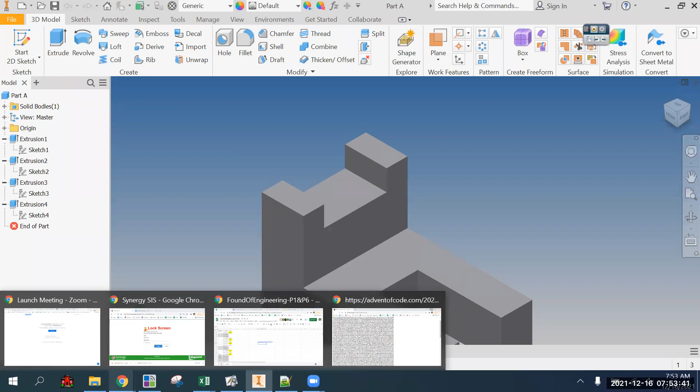All right. So plan for today is we are starting the dimensioning, a little more dimensioning, advanced dimensioning practice. But this is the first video for first period. And the way it's going to work is, because the overall goal is to dimension every part from the part file, from the green sheet, I'm going to be doing half of them in first period and the other half in sixth period. And so we already did part A and B in first period, and this video is going to be part C and D, probably, maybe more.

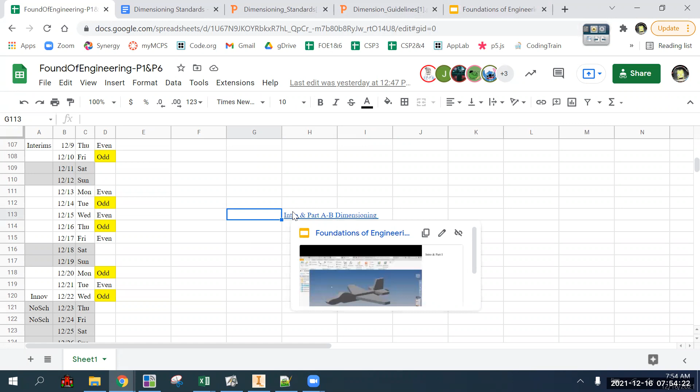But because it's the first one for first period, I'm going to do the introduction portion of what we're doing and then go into part C and D dimensioning, because it doesn't really matter the order that we dimension the parts from the green sheet. We're going to get them all, just with enough practice.

All right, so here is the situation. First, some technical stuff. We are going to be in Inventor, and we're going to make a new drawing file. And this drawing file is going to be similar to the one from the Puzzle Cube, where we had one drawing file, but with several sheets to have everything organized.

And I would like to have, I guess you can move them around pretty easy. All right, well, then I guess we could do these out of order. There you go, that's the thing.

We're gonna have one drawing file with 12 sheets, one for each of the different letters, parts from the green sheet, and they are each going to be a multi-view, front, top, right, top right, 4 views on the same sheet with dimensions. The point of this is not for you to just make these sheets and throw dimensions on there. It's to learn the process of dimensioning and putting dimensions in the right location and not over dimensioning, and so on.

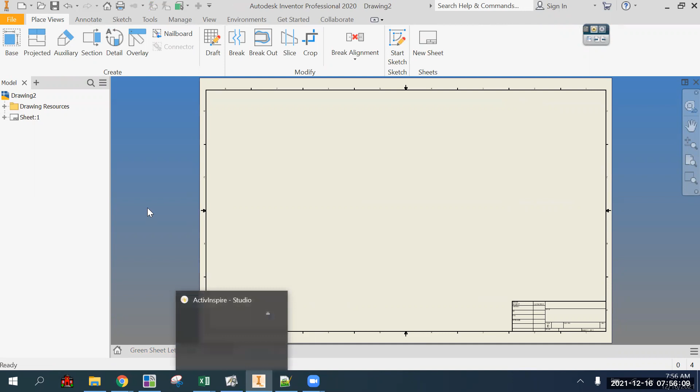Now, first, technical issues: if you didn't do all of the green sheet parts, you're going to have trouble with doing this, because in order to do the multi-view of something, you need the file that it's based on. Okay, so if you are someone who does not have all of the green sheet shapes, you need to acquire them. Now, the way you're going to do that is from your main folder window. You're going to find the handout folder, which is down here.

You may have never used the handout folder before. You're going to go to Holt. And again, this is only if you don't have all 32, all letters and numbers of the green sheet. Okay, handout, Holt. It's in period 1 and period 6. Right click on green sheet parts, that folder, do copy, and then right click on My Documents and do paste.

And the reason for that is, even though you could, in theory, open up and make drawings from the parts directly from this handout folder, I don't want to do this, I want to cancel that. That could be bad. You're not going to be able to make changes to them the way you would if you had ownership, and that's why you would make a copy. But again, that's only if, is there an undo? I shouldn't have done that. So either way, first you need to have all of the parts, all of the part files.

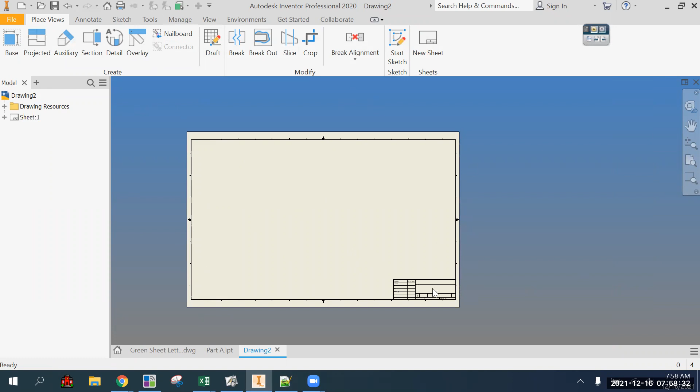Step 2 is make a new drawing file. And like I said, we are going to have one sheet for each of the letters. This drawing file is going to have 12 sheets, one for each of the 12 letter parts. And each sheet is going to be a multi-view, like I showed before, with top, right, and center. So let's start by getting our 4 views on the sheet, and then we'll talk about the right place to put all of the dimensions and the mantras and trade-offs and that sort of thing.

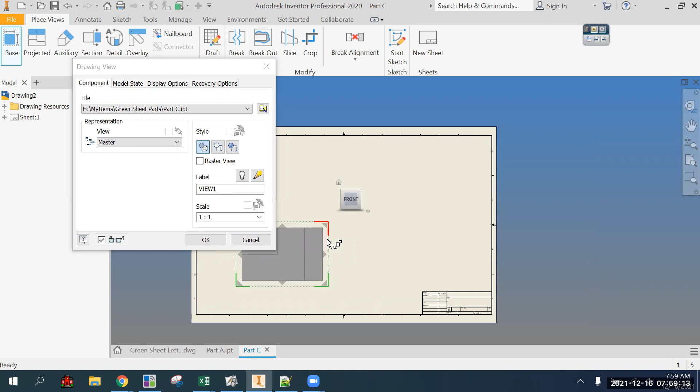So we're always going to start with a base view. You're going to click on the Finder button and choose the part file that you want to start with. Let's start with part C for now. Hit open. Now, a couple of things happen automatically. First, because of the way that we made the part, it's going to guess this as your front view.

And for almost every single one of the green sheet parts, the front face is probably going to be the best front view, and that's just because of the way that we made them. But sometimes your best front view is not going to be the one that comes in as front, and actually choosing the best front view is part of doing good technical drawings. The front view is going to be the view that gives the most information about that shape.

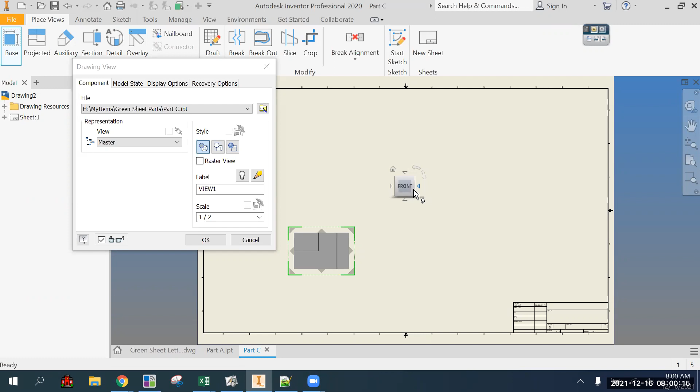Most of your dimensions are going to be on the front view. Most of the contours around the outside are going to be on the front view. And for now, we'll just go choose this as front view.

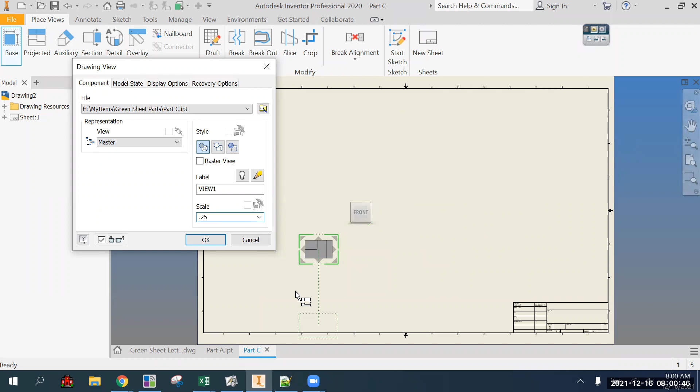Okay. Then as far as scale goes, again, a coincidence that a 1-to-1 scale seems to work well on the size of our sheet. This is a complete coincidence. Your drawing might come in and 0.25 might be the right size if you're drawing something big. The sheet itself has built-in dimensions. It's based on an actual piece of paper.

I don't think it's our traditional printer paper, but is that 8.5 by 11? It might be, but oh no, it's probably not. But the 1, 2, 3. No, it's much larger than that, because this is 9 inches across. So this is a giant piece of paper. Anyway,

based on the size of your actual part file, you're going to need to scale it, but you want to scale it so that it takes up most of one of the corners or quadrants, one of the quarters of the paper, so that you can fit 4 views comfortably. You definitely don't want them overlapping the edges or each other. In fact, to start, I'm going to make this 1.25, and you don't have to actually do 1.25 to 1, just to show you what slightly too large looks like. And you can change it very easily.

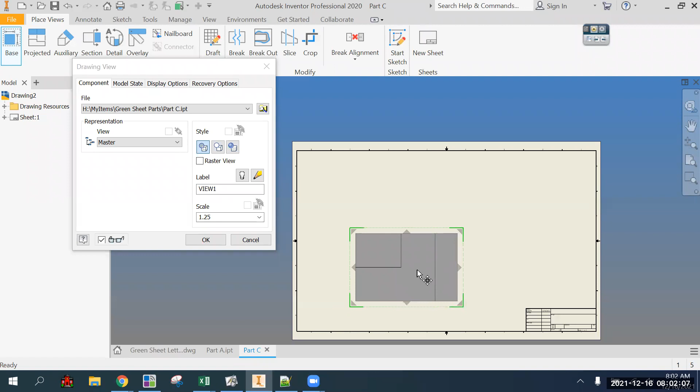So we're going to put our front view down here in the bottom left, and that's our base view, and hit OK. Then we're going to go to projected. Click on the view we want to project, which is our front view. And actually, I'm going to get rid of some of these toolbars so that we get a few more pixels to work with. Okay, so I am viewing this one, the front view.

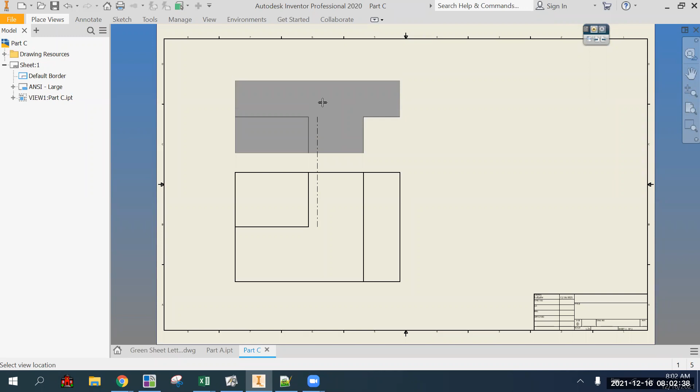So I clicked on that, and now I click up here where I want my top view. You'll notice that it lines up exactly. Even if I move my cursor left and right, it doesn't make it slide. It forces it to line up exactly, unless you go past a certain point. But either way, top view there, right view over here. Okay, you can see it just gave the outlines, which it's supposed to.

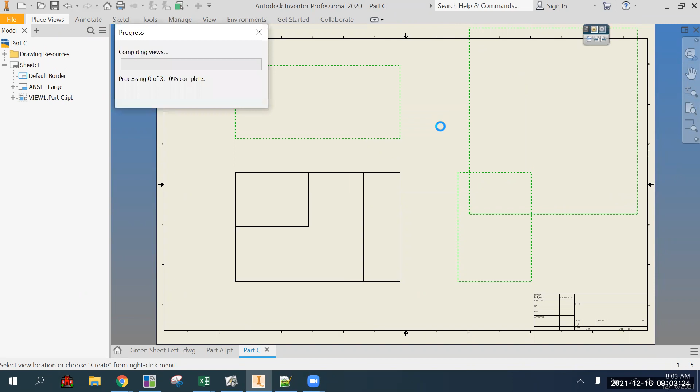And you can see it's starting to get a little crowded, even though our front view sort of looks like about filling up one quadrant of the page. Either way, I'm going to go ahead and make my top front right corner view here. We'll do right click, create. Once you have your 3 projected views, right click, create, and you can rearrange them.

The top view can only be arranged up and down because it has to line up with the front view. And same thing with the right side view, can move left and right. If you want to move the location of all 3, you need to move the front view because they're all always going to be tied together, which is critical. And even if I rearrange things, it's a little tight. So I'm going to go back to the front view, do right click, edit view, and change the scale to just 1 and hit OK. And it will update the other 2.

Editing view on one of these orthographic views, which are these, doesn't change our isometric view. So we need to right click edit on that and change that to 1. Can't decide if I want to stick with our hidden or shaded or unshaded view. I don't think shaded adds that much just because it's monotone, and yeah, we'll just stick with our basic unshaded, the default.

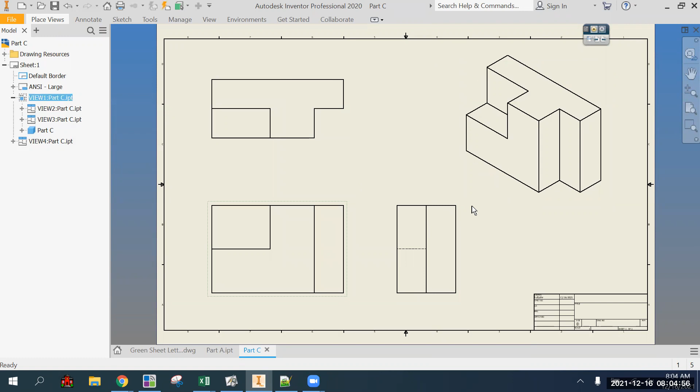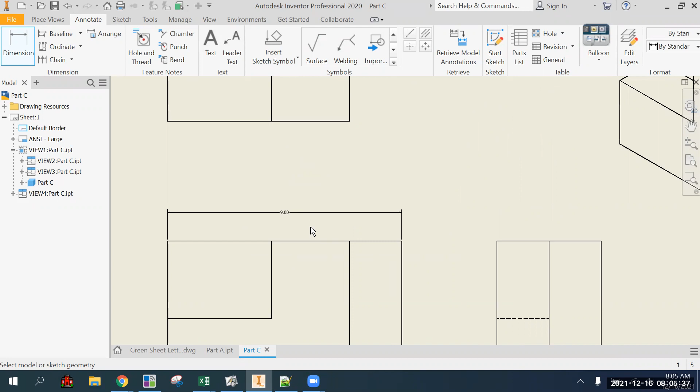All right, so this is our base for this, and we're going to add in under annotate. Dimension is our main tool. It's also hotkey D for dimension. And it is a lot like dimensioning the part itself, dimensioning the sketch before you do the extrusion when you're making the actual part. Except the difference is that the reason you put dimensions on it is to show how big something is rather than to change and constrain how big something is the way that you would when you actually built it.

And that goes to the entire point of this. The point of this is sort of a blueprint that you could give to somebody and they could recreate this part exactly from only the information on a single sheet. That's why you need multiple views. If you just had a front view, you could give all of the height and width dimensions that you need, but there's no way to explain what's happening here without some sort of depth view. Okay, same thing here. We don't know that there is a notch here unless you have the top view.

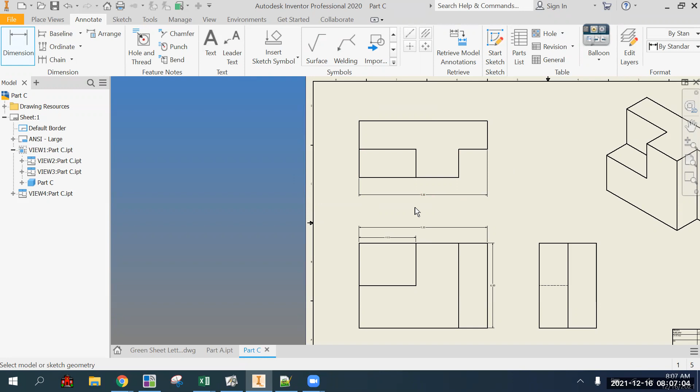But the key is knowing where to put these dimensions to make sure you have enough dimensioning that you've fully dimensioned it so that somebody could recreate it, but also making sure you don't have too many dimensions or over dimensioning or redundant dimensioning, because even though these are very simple parts, if you had the total width dimension twice, nobody's likely to be confused.

But if you have a super complex part and you start throwing in redundant dimensions, it can quickly get out of hand. And that's sort of one of the principles of dimensioning, is keeping it neat and tidy for the sake of avoiding confusion. So that's what we're going to work on. All of the rules for dimensioning and processes are about avoiding confusion, avoiding lines crossing over, avoiding dimensions on the part, trying to dimension to the contour, okay?

Meaning this location right here, either this line from this side or this line from this side, they're dimensioning the same thing, even though they're different numbers. You are giving the horizontal location of this feature. The problem is on the front view, you can't really tell what it is. You just know there's a line that is 7 inches from the left or 2 inches from the right. On the top view, it shows that is referring to this sort of cutout in the front right. So the dimensioning of the location of this line should be on the top view. Okay, and it's a lot about trade-offs, which is the better place to put it.

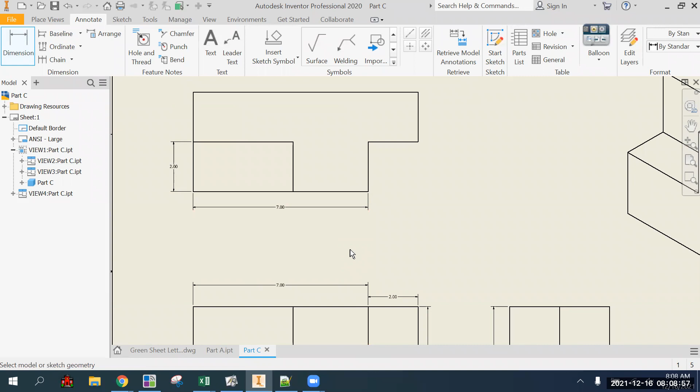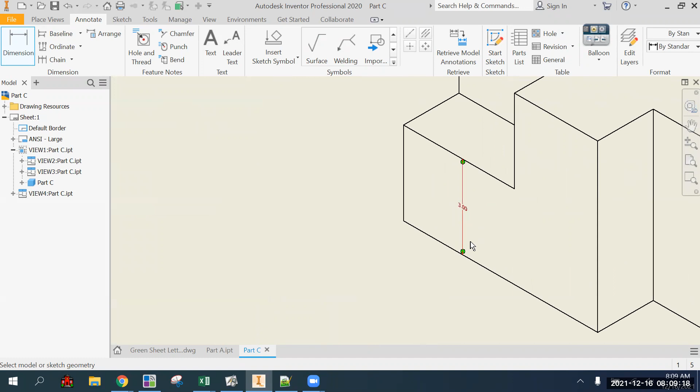Same thing with hidden lines. So the height of this ledge, which theoretically we could put the dimensions on the isometric view. In fact, I think that looks pretty cool, but that's not what we're going with. The height of this ledge is 3 inches off the ground, but that means we either need to put it, let me get rid of these extra dimensions. And in fact, I have a plan. Let me see here.

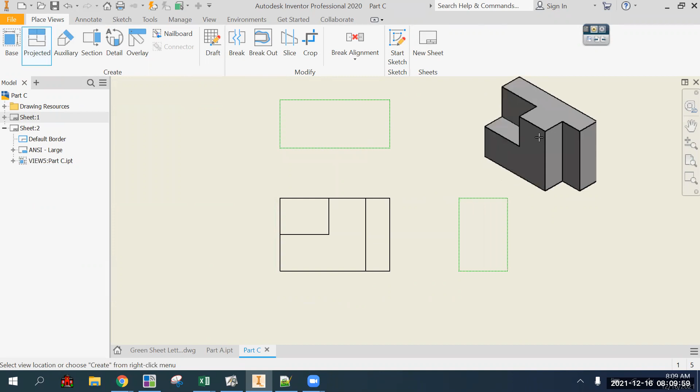Let's go back here. I'm going to make a new sheet with part C except super small. I think that will make the actual dimension lines larger. So now when I annotate, yeah, there we go. Okay, so your dimension lines will not be this big because your sheets are going to look like this. I have made my multi-view here just so you can see things better.

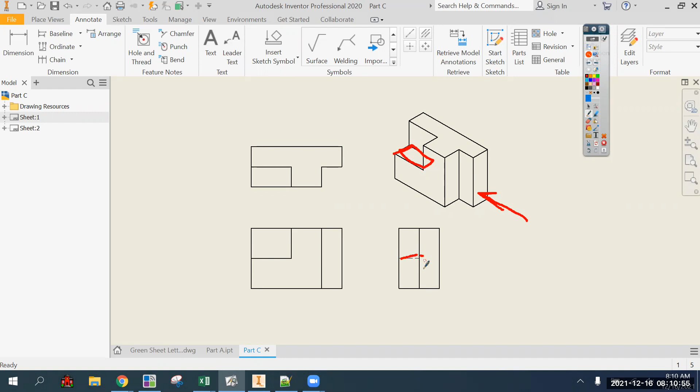All right, so these dashed lines are hidden lines. And that's because this is a right side view. When you're looking at this part from the right, you can't see this edge, or really this surface, but it is projected with a hidden line right there. Okay, so this is referring to the height of this ledge, but so is this. So we have a few options of where to dimension the height of this. Dimensioning over here would be dimensioning to that hidden line. And dimensioning here would be dimensioning where it actually is showing the shape. Not ideal because it's not really a contour. You could dimension here, but then we have extension lines crossing onto the view, and we don't want that.

Okay. I don't expect you to have completely internalized everything I just said about choosing locations, but that's an example of the process of choosing the best location to give a particular dimension. But the key is that we only want one of these, because otherwise then you're over-dimensioning.

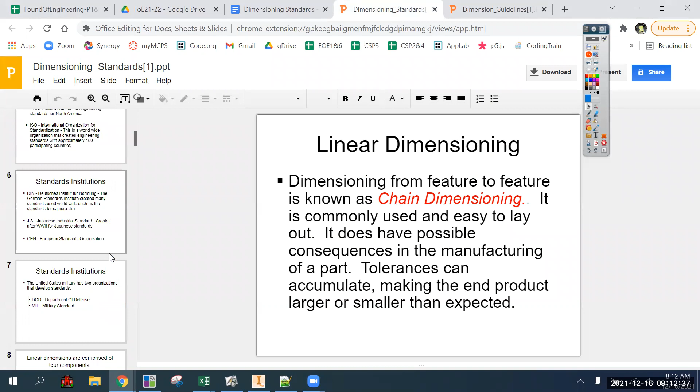All right, so the actual rules, as I have declared them, in our spreadsheet, there is a link to a folder called Dimensioning Documents, and it looks like this. And the two files that we're going off of are Dimensioning Guidelines and Dimensioning Standards. These are PowerPoints. And Dimensioning Standards is a little more formal in that it's actually talking about what the different marks on the page are. Extension lines are the really skinny lines that go up to but don't quite touch the part. Dimension lines are the arrows that point away. The dimension text is the actual number.

And normally, let's say in past years, we have done all of our drafting technical drawings on paper before we went to Inventor. And I think you guys actually are missing out on a little bit, because doing it on paper forces you to learn all of these conventions, all of these standards. But it's just so tedious to do everything on paper first

that there isn't really a world in which, even if you went into drafting, design, engineering, whatever, that you would be doing stuff on paper. So much of this is done for you. You can kind of just gloss over it. All of these standards that the extension lines extend past 1/8 of an inch and stuff like that. That's for the good old days where you get out your ruler and actually do stuff on paper.

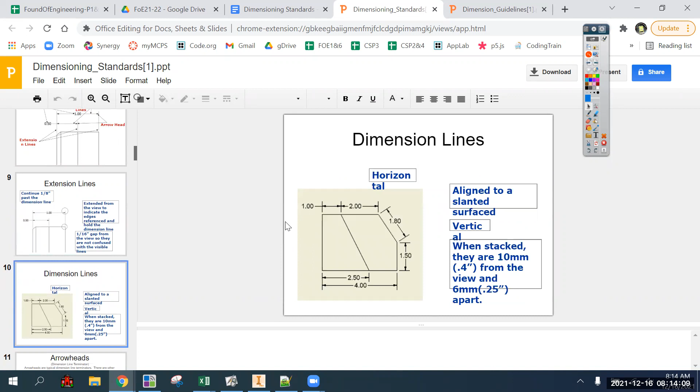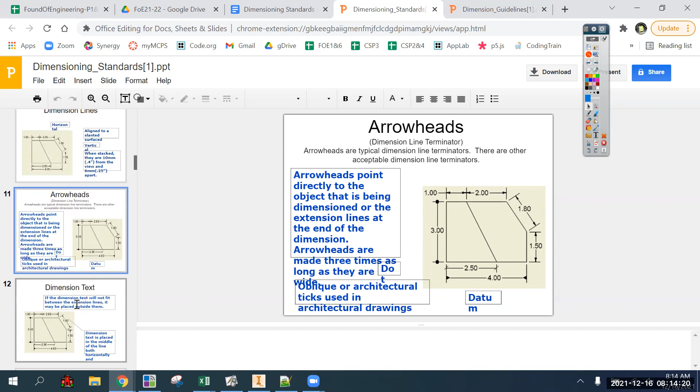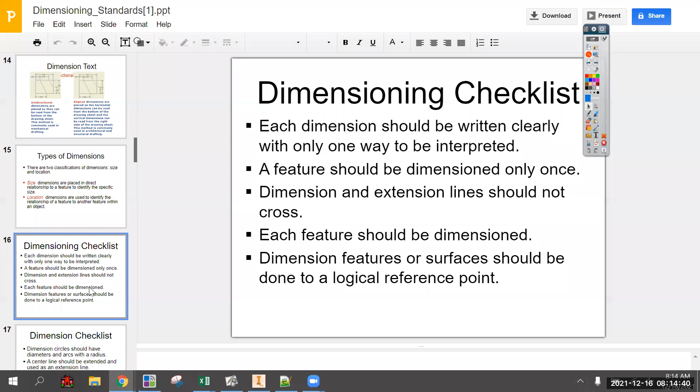But knowing about it is good. Okay, arrowheads are on this size and that sort of thing. And you could have the dimensions either all pointing the same direction or have them lined up with the arrow. Okay, size, location, dimensioning checklist, blah, blah, blah.

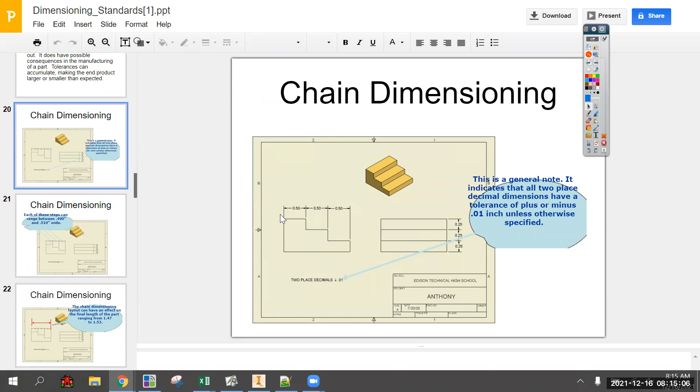Okay, we are going to be doing what's known as chain dimensioning. This is a chain dimension where each dimension of a certain, we'll call it direction, even though they are dimensions. I mean, it's like we ran out of words: there's height, width, and depth, which are the three dimensions. Dimension is also the number that describes how far in height, width, or depth. Dimension is also the verb of putting dimensions on the drawing. So you're just going to have to learn it from context.

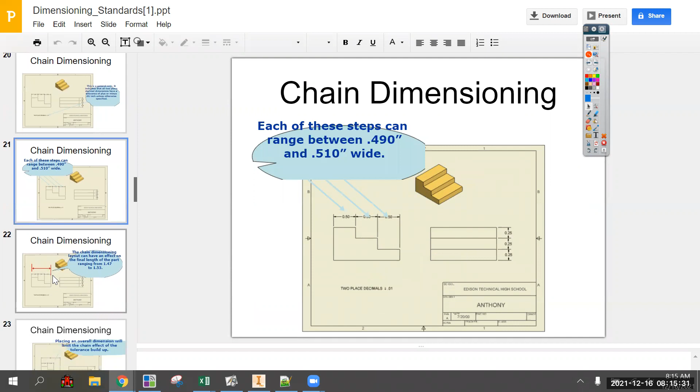But either way, chain dimensioning is where you're dimensioning one after another, and that's fine. But what we are going to do is what's called stacked dimensioning. And why is there not an example here? I thought there was one. Maybe it's on the other one. Did I pass it? Impossible.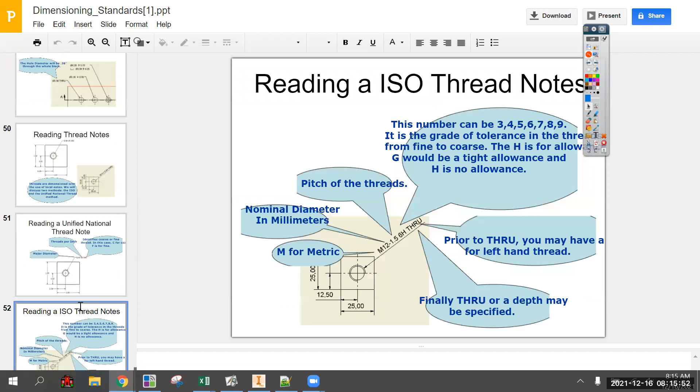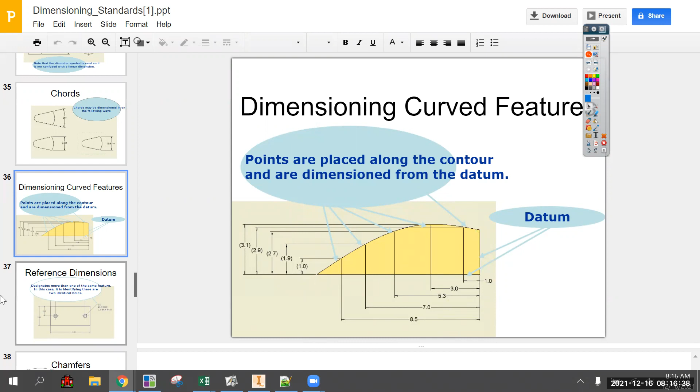Stacked dimensioning is like this, where all of the dimensions in any of the directions are going to be measured from one of the sides. In this case, all the height dimensions are measured from the bottom edge. All of these width dimensions are measured from the right edge. And I think this looks much tidier. It also is a better way of making sure you get every dimension, and it works better for more complex things to make sure you're not missing dimensions.

When we get to the backside of the green sheet, we will talk about how circles and arcs are dimensioned by their diameter or radius, depending on whether it's a complete circle or just an arc. Also, Inventor does that for you automatically. It chooses whether it's a diameter or radius based on whether it's a full circle or not, but that is for further along.

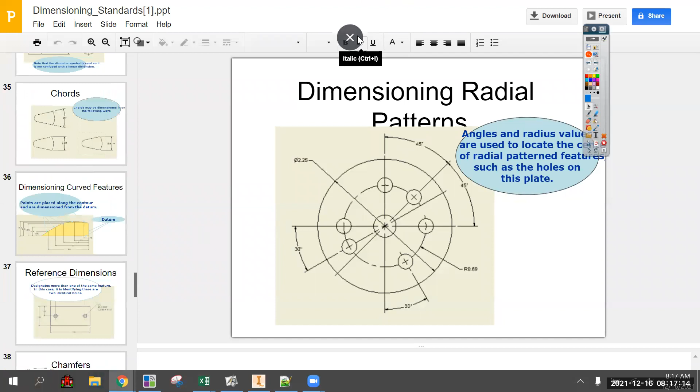The dimensioning guidelines slides is a little bit more useful in that it's going to address the issues of the choice of where to put a particular dimension. And one of the files here, Inventor, is this Inventor tips rules? No, dimensioning standards. That's not a good name for it. Let's call it dimensioning sins. We'll put quotes around it so nobody gets upset. Dimensioning sins.

Okay, so each of these different options, when there isn't an obvious location to do something, like the front view is not the best location and it would cross over, or it's just not easy to put a dimension on something, we're going to go through the trade-offs, which is worse. Putting the actual number on top of the view is worst case scenario. Having extension lines cross is not the end of the world, but it's one of the worst. You don't want to dimension the hidden lines or not go to a contour. Those are more about adding information rather than having lines cross.

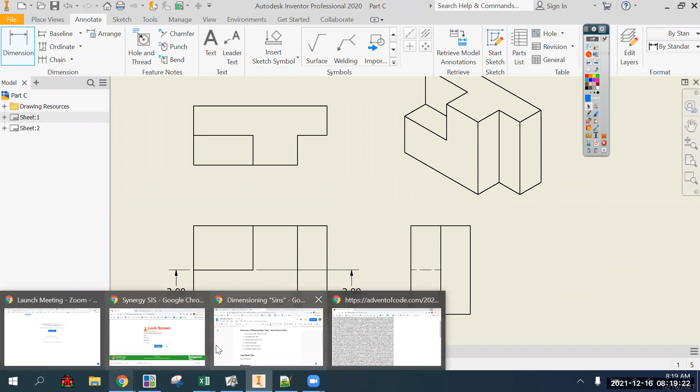Sometimes your extension lines will have to cross onto the view itself, especially if there's some sort of internal feature like a hole or something. Your extension lines need to go onto the view. Sometimes it's unavoidable. It would look something like that, except we can dimension the height of this line on the side. That's fine also in this case. And not going between adjacent views.

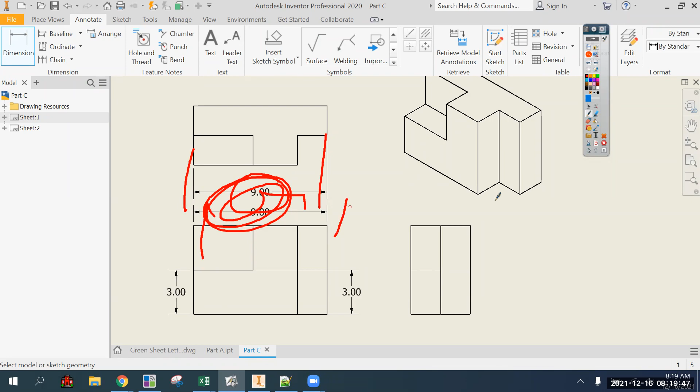That means if given the opportunity, you would want all of your width dimensions to be here, between the top view and the front view. You would want all of your height dimensions to be in this region, ideally, and all of the depth dimensions to either be over here or over here. The reason for that is, again, all of these rules are designed to avoid confusion on far more complex drawings.

If you have the location of this line over here, which crosses an extension line, but just for the point of explaining between adjacent views, the idea is if you're looking for the location of this on the front view and your eye has to travel up the page, crossing dozens and dozens of other dimensions for a more complex part to find that particular value, more likely for confusion. But that's why it's super low on our hierarchy. It's not that bad compared to these other things. Okay, there's no reason to overdimension. Overdimensioning is more stuff on the page that's unnecessary.

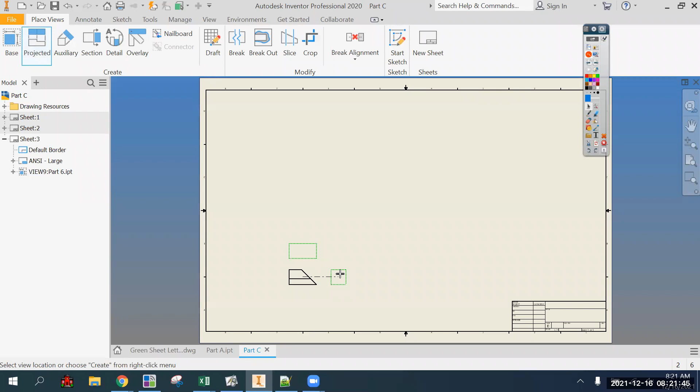And some mantras for deciding: if you didn't need the dimension when you built it, you don't need it in the drawing. For instance, let's make a new sheet. I'm not jumping ahead to this one, but something like this one. Okay, and let's do like that, and projected of this. We aren't doing this one yet, but just an example.

When we made this part, we never needed to know the length of this line. That was not a dimension when we made it. The reason why is because as long as we knew this dimension and this dimension, we could just connect these points when we made it. So we didn't need to know that dimension.

We also, I don't think on any of the green sheet parts, needed to know an angle dimension. So I know if you're throwing in an angle dimension, you are just sort of throwing dimensions on there. And that's one of the things I'll look for when you're doing these on your own. If you are just throwing redundant dimensions on things, I know you don't know what's going on.

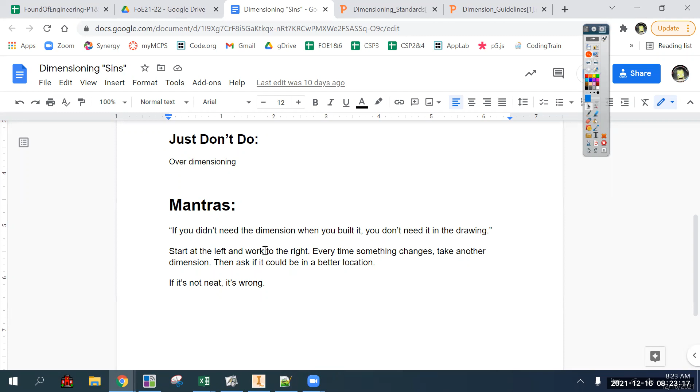All right. So the point is, if you didn't need it when you built it, you don't need it for the drawing. Our literal step-by-step workflow is going to be: start on the left, and every time something changes, put another dimension, and then go down the hierarchy if it's not where you want it to be, if it breaks one of the rules. And then if it's not neat, it's wrong. Although, because it's Inventor and it does pretty much everything for you with arrows, touching extension lines, and choosing the best format for everything, it makes it pretty easy.

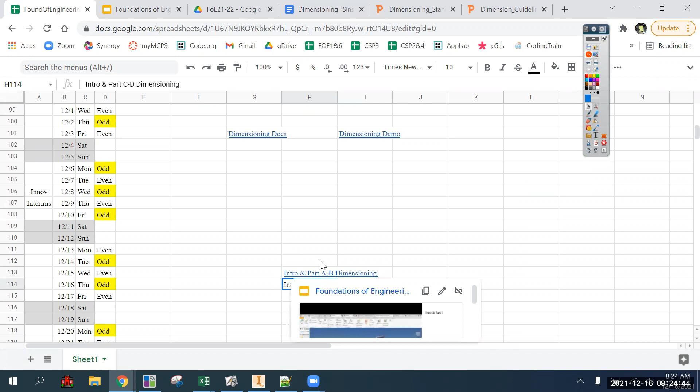All right, so for first period, this is the introduction for first period. No, that's not it. Let's go to this one. This video is the introduction you just heard that I gave for sixth period, as well as, wait for it to pop to the slide, there you go, the dimensioning for parts A and B. I will put here intro and part C and D. I don't think we'll get to E today. Dimensioning. First period, which I'm recording now, is going to have to go back and watch the AB. We'll have one of these for each.

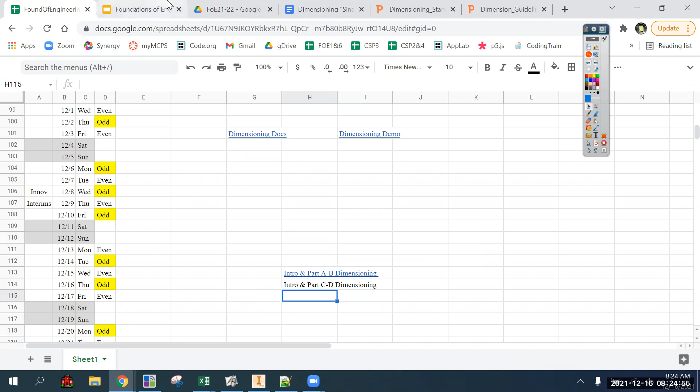And so I'll put this video up, and when we're done here, let's call that other intro. I think this one is actually probably a better intro than the one I gave yesterday. Other intro and parts C and D dimensioning. That's not how you spell dimensioning. I will put the video of the thing that is currently being recorded there. And we'll just link it there, even though there's no video there yet.

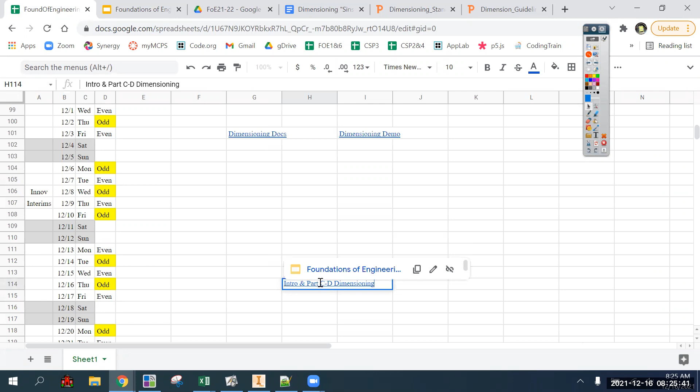All right, so let's go ahead and actually start building our drawing file and multiple sheets. The overall goal is to have a single drawing file with one sheet for each of the lettered parts. This first drawing file will be parts A through L, and we'll have them in order at the end. But we can actually build them out of order and then rearrange them to be in alphabetical order, which is probably better, because they aren't in order of complexity.

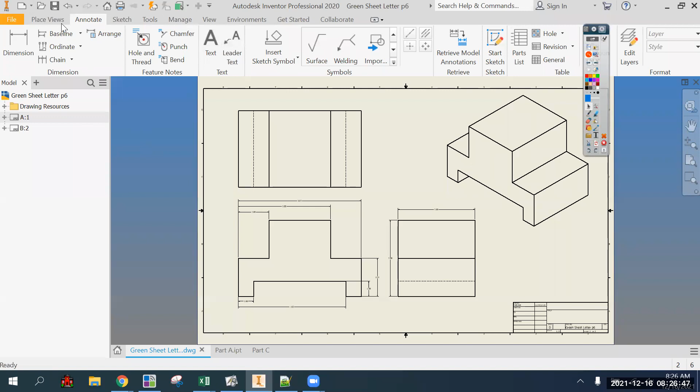So right now I have A and B done from yesterday, but I'll just build off of this one later. So you guys are going to start a new drawing file like that. It's going to start on its first sheet. Let's right click on the actual word sheet in the browser bar and do edit sheet, and let's just name the sheet C. If you're watching this from sixth period, then you already have parts A and B done, so you would just go from place view, new sheet, and name that one C.

And eventually all of yours, regardless of period, will look the same. So let's go ahead and save this full drawing file and put it wherever you saved the parts themselves. Most of you, if you listened to my suggestion, put them directly into the My Documents folder, and you just have a list of all of your Inventor part files there. As long as you name them something meaningful and descriptive, it's easy enough to find them. If you made subfolders for your different projects, great. If you copied from the handout folder because you didn't have all the green sheets, that's fine. You're not going to get double penalized for it.

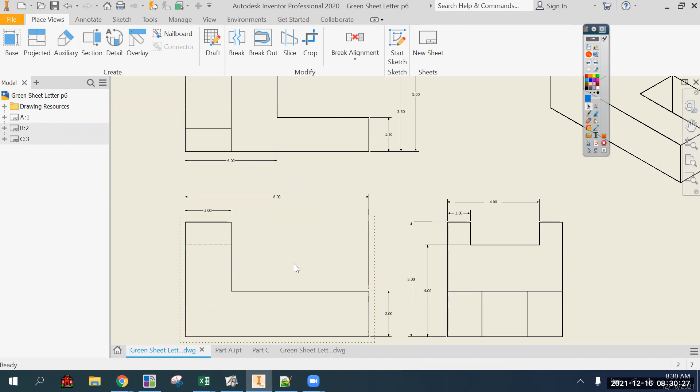Because if this is your drawing and you wanted to change something for a drawing that already exists, you could right click on the part and go to open, and it opens the part file. And then you could change something about it. Let's make this 10 wide. Do finish sketch, and then save this part, and you go back to the drawing, and it should update. There you go. It updated it.

So the point is, it needs access to that file. If you change the name of a file after you've used it, it won't work. We talked about that before. And if you save it in a different location, it won't be able to get it if you change the location. So just be consistent with your saving practices and whatever.

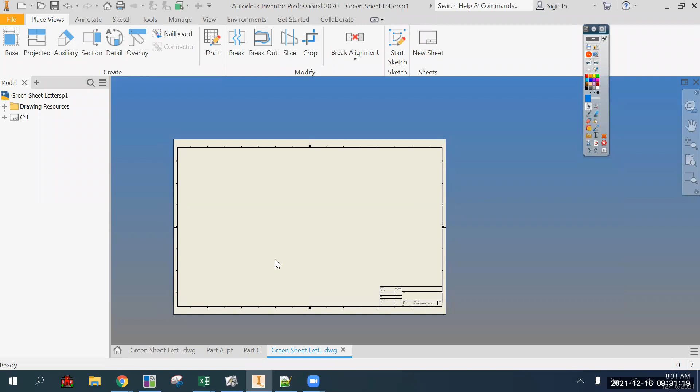All right, so we're going to go ahead and make part C. You're going to do base view, find your part C. Oh, wait, we already did this. You already made a base view for part C, which was base, find part C. Choose the best scale, which for you is probably going to be 1:1, and place it down here sort of in the bottom left quadrant so we have room for everything.

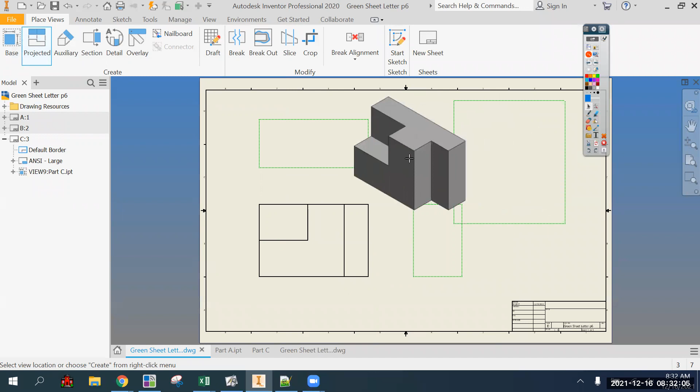Hit OK. Then projected view, click on the front view itself, go up to do top view, to the right to do right side view, and to the top right to do our isometric. Then do right click, create, and respace them as necessary. And that is our starting point. And we should go ahead and just do text boxes now.

So under annotate, you can get a new text and make a text box like that. It will pop up. Let's just call this part C and hit OK. And it'll put it in the top right, but you can center it again. If you highlight it and change the size, that'd probably look a little better.

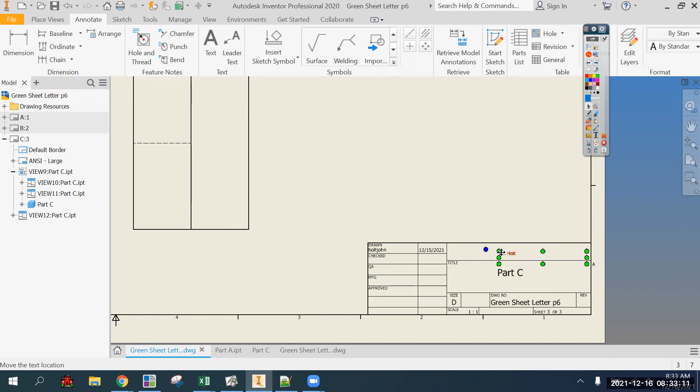And let's put one for name right here. Even though this says drawn here, just put your name in that box. And I still have the text tool, so right click OK. Then you can drag around the actual text thing to center.

All right, so now we need to put some dimensions on here. The key, the mantra, the process, the first thing we're going to do is do our width dimensions. And we're going to start on the left side, and every time something happens, we're going to add a dimension, and that way it will end up being our stacked dimensions. We'll end up stacking in that manner with the smallest ones closest, and it ends up looking super neat. And by neat, I mean neat and tidy.

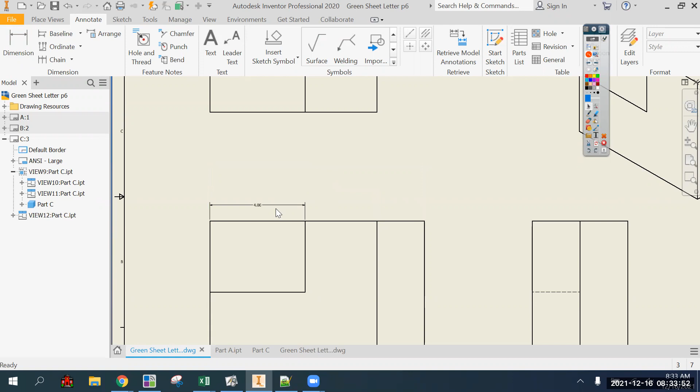I am going to do, like I showed before, my tiny drawings so that the actual numbers are visible. Yours are fine in that default small text. When you print them out or make a PDF, it'll still be plenty visible.

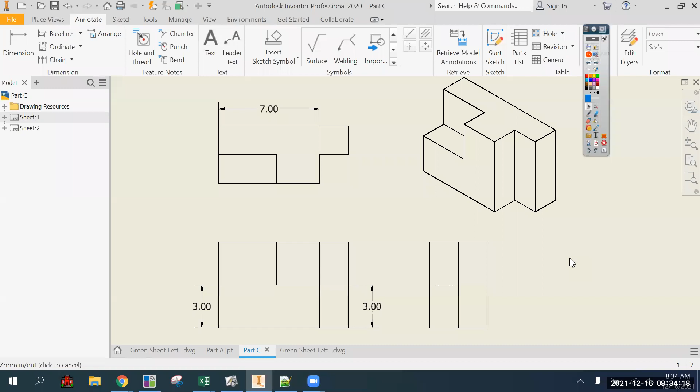You should still get used to moving around the sheet itself. It works a lot like the part file, where mouse wheel up is zoom out, mouse wheel down is zoom in, and press in the mouse wheel button and it gives you the grip hand. That's super useful. And the home key will zoom to fit the full page. There's these tools over here also, which do roughly the same thing.

So there's that. And anytime you have a tool, right click, OK, done, or hit the escape key. That's pretty neat. Normally, it actually says there's a little icon of an escape key there rather than just the letters ESC in brackets.

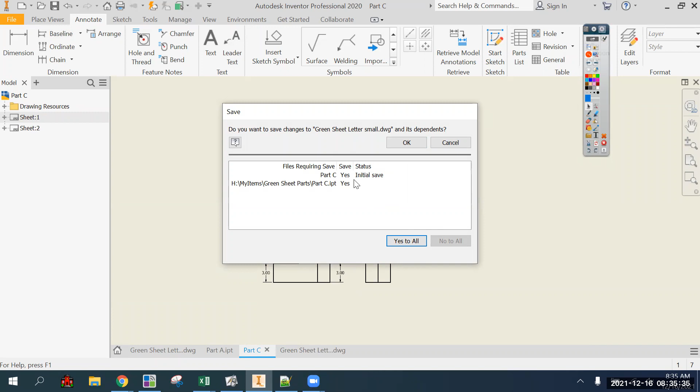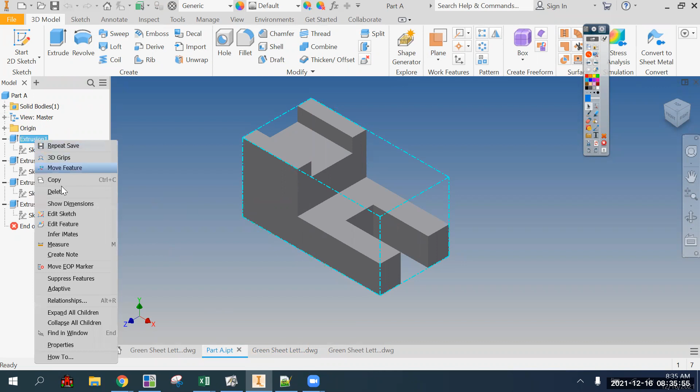Anyway, so our dimensioning, let's save this as Green Sheet Letter small. This is something else. This is going to be my drawing files that are small enough that you can see the numbers. Anytime you see this dialog box that has yes to all as a button, click yes to all and then click OK. It does different things in different scenarios, but the point is that you don't need to worry about it. Just do yes to all and OK.

I'm going to put this back the way it was and save it and close it and update this from before. There we go. This will probably give me a yes to all. Nope, it doesn't. All right, so let's go to this. Okay, so we need to go through the process of dimensioning.

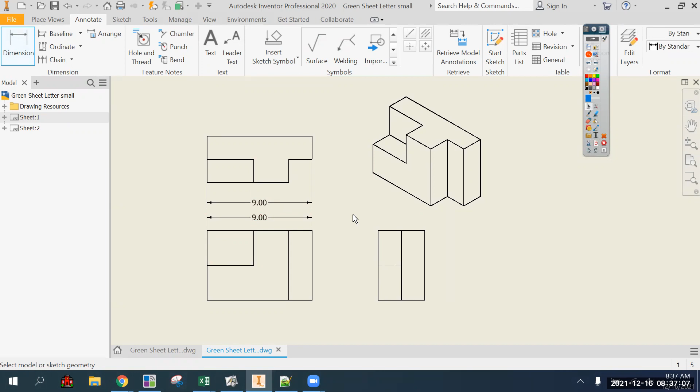We're going to do width first, width left to right, then height down to up, and depth front to back, which is fine. So our width dimensions are going to start here on the left side of the page, which is also the left side of the part, and work our way right. Our goal is to put all of the actual dimension lines here or here, sort of in this region between the different views, because that's one of our goals. So let's go ahead and start on the left and put our dimension on our front view.

Okay, starting on the left side, the first thing that happens is this edge right here. You can't really tell what that edge does at a distance of 4 inches from the left. If you look at the multi-view, you can kind of see what it's referring to. But it's not ideal because it's not going to the contour, but there isn't really a contour from this because it's a flat. The other valid option would be to put it on the top view. You can't have it both places, but neither is really good, neither is really bad. So we're just going to put it there.

Okay, going back to the left side, the next thing that happens is this edge right here, which is the distance to this, like that. But on the front view, it's not really ideal because from the front view, you can't tell what's happening at that distance. This angle doesn't show that it's actually a set back. It could be a set forward, it could be a diagonal, it could be curved. You can't really tell there, which is why this dimension we want to put on the top view, because you can see from the top view that it's actually the edge of the shape. It's a 90-degree turn that goes back this far. So this second width dimension is going to be better off from the top view.

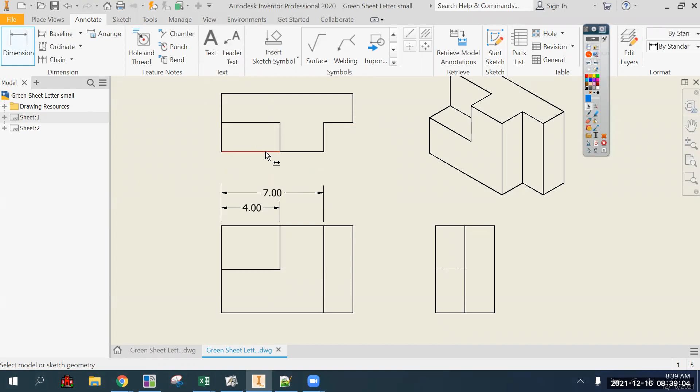You'll notice as you go along that as you're actually placing the dimensions, you won't always get the entire line if you click from the line. Sometimes you will, but a better practice would be to choose the actual points that you're dimensioning between. Okay, so you have the dimension tool, first click here, second click here, third click to set it. So that is the best place for that one.

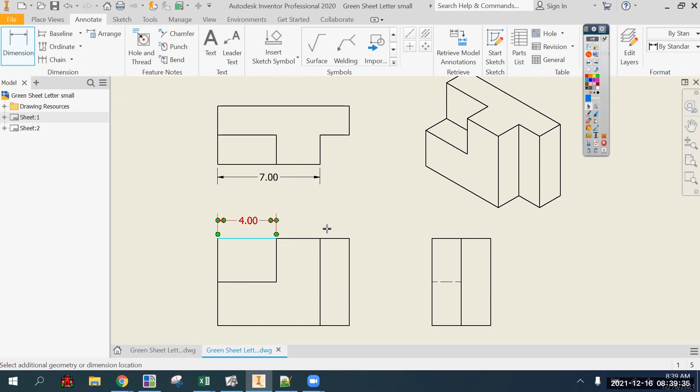And the only other width dimension is total width, which technically speaking, total width always goes to a contour because it's the edge of the shape. A contour means the perimeter of the shape. So we only need one of these two. I will usually defer to the front view just because most of the dimensions are going to be there. I think it looks better. Okay, and that's it for width.

Okay, now we'll do height dimension. Going from the bottom up, the first thing that happens is the height of this ledge right here, but our extension line crosses onto the view. We don't like that. Second option is going to be over here on the right side, but this is dimensioning to a hidden line, also pretty high up on our list of dimensioning sins.

Okay, extension lines across the view is not good, which was our first option. This is extension lines going across the view. The other option was hidden lines, which is worse. Higher up on the list is worse. Our third option is putting the actual dimension over here outside of adjacent views. But that is the least bad of our list. And that's why we're going to keep it there.

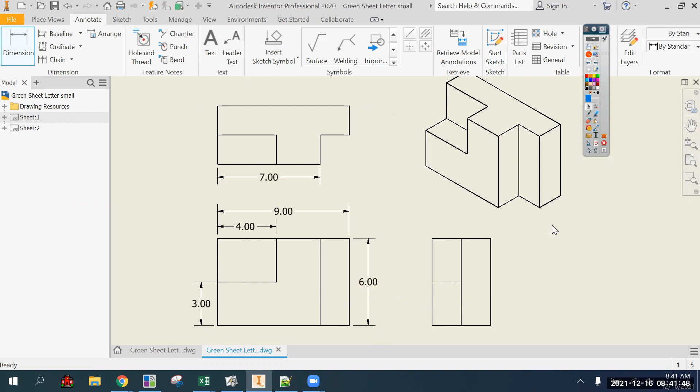Our only other dimension that we need to dimension is depth. So depth is front to back, and front to back is either going to be on the top view or the right side view going that direction. That is front to back when you're looking at the right view. So even though this is to the left of this on the page, and this is the right of the view, we wouldn't refer to it as the right and left. This is the front of the part. This is the back of the part. This is the front of the part. This is the back of the part, even though it's on the page in a different location.

So let's do our depth dimensions working front to back. Okay, first option, starting at the front, working our way back, is this ledge right here. On the right side view, this first depth dimension goes to a line. You can't really tell what's going on. If we do that same dimension here on the top view, you can see that it's the dimension of a cutaway. So we're going to keep that one.

And the only other depth dimension is total depth, which is between here and here, or between here and here. Having both of them is wrong. Having both of them is over dimensioning or redundant dimensioning. And in that case, you need to get rid of one of them. And neither breaks a rule. They're both between adjacent views. Total width and depth always goes to a contour. It's all good. In this case, I think it looks better to have as many dimensions as possible on the same view. So I'm going to get rid of this one, but it doesn't really matter.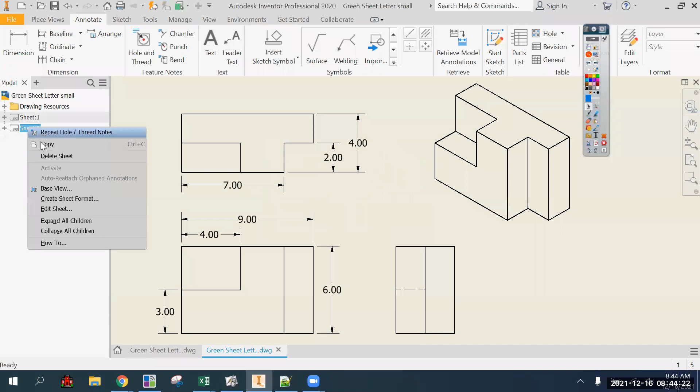Okay, and you want to space things out nice and even. And there you go, part C. That's it. Width left to right, height down to up, depth front to back. Okay, and save it. And this will be part C. Let's edit sheet, part C. And let's see, what do I have going on here? Good. And so that's part C.

Let's go on to part D, which I can look at from the drawing file. So we're going to need a new sheet. So under place views, go new sheet. Let's rename it. Right click, edit sheet, and call it D. And let's bring out part D. So we'll go base view, and we'll go down to D, hit open.

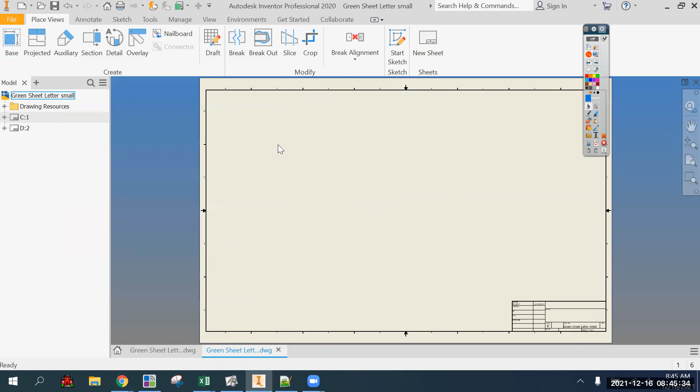And I would say this is definitely the best front view. Again, you aren't going to have many hard decisions with these part files because we made them from the best front view to begin with. So let's see here. Let's go edit sheet, call it D. Oh yeah, you can see the default sheet size is called size D. And this actual piece of paper is 22 inches tall and 34 inches wide. So we would never print it out full scale.

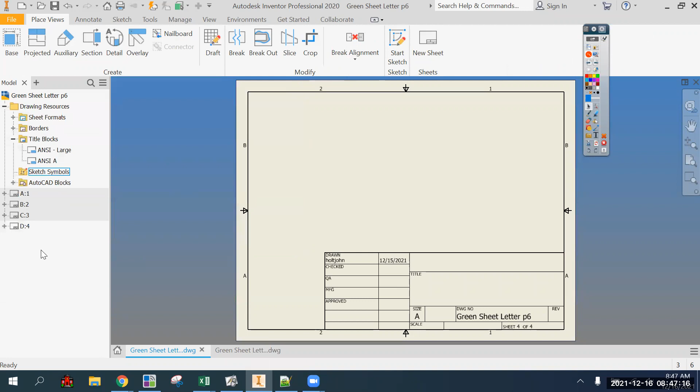But you know what? I wonder if that would change things. If we did sheet size A4, which is what we normally have, 210, that's got to be millimeters. No, that's not good. Just trying to solve things for you guys so that the dimensions actually look good. That's 8.5 by 11. That's even worse. Oh, how would you make that like that? Is it one of these things? No, I don't want that. So let's just leave it as our default. You will be able to see the dimensions regardless.

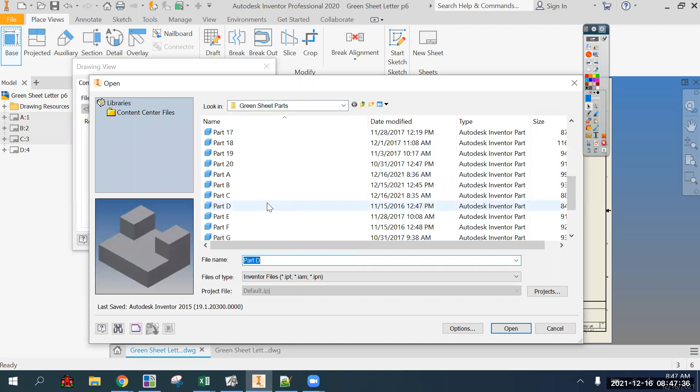All right, so we now have our fourth sheet for some of you, second sheet for some of you, and we'll bring out the base view of part D. And I think our 1-to-1 scale will work fine. This is our best front view. Keep it down here in the bottom left. And there you go. Maybe a scale of 1 1/4 will work better for this. But either way, we'll get a projected view: click on the front view, go up into the top right, right click, create. And yeah, I think that's all right. I think 1 1/4 might get a little crowded, but if we just stick with a scale of 1 to 1, that should work fine.

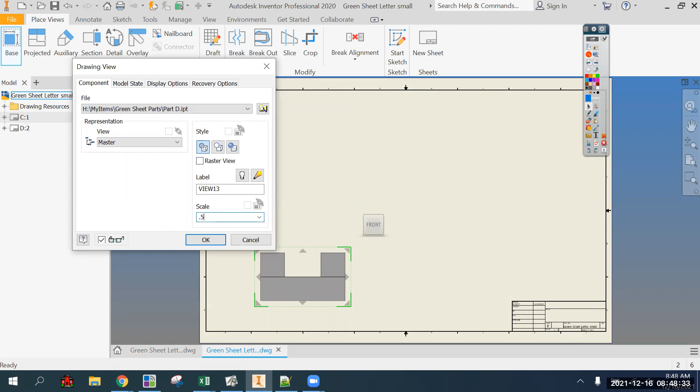Okay, and now we're going to add some dimensioning. I'm going to make the tiny one so that you can actually see what's going on. Let's try half scale. And hit OK, and I'll do my tiny projected ones. This is not what you're doing. All right. So let's work on our dimensioning process. We'll go to annotate and dimension. And start on the left. Every time something happens, take a dimension. On the left side, the first thing that happens is when this edge changes. Okay, I think that's still too small. Let me restart here.

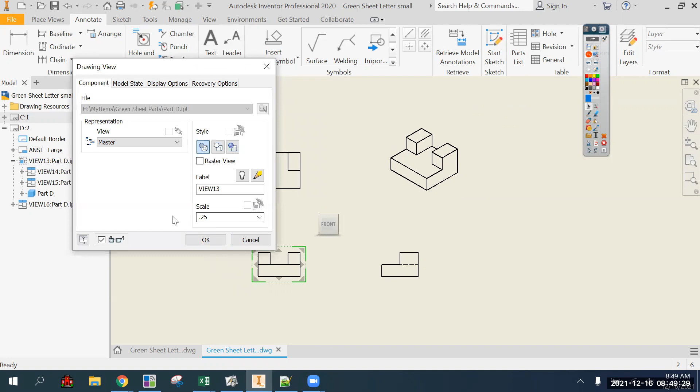And I'll change this, edit view. Maybe 0.3. I'd like that to be in the middle. Ignore all of this. Nope, that's not what we want. Edit view. This is just for the example.

All right, that's fine. Okay, so the first thing that happens is the dimension of this first sort of pop-up, okay, from the left side. Perfect. Okay, this doesn't break any rules. It's between adjacent views. It goes to a contour, not a hidden line, not crossing over. It's beautiful. Okay, we'll go back to the left.

Next thing that happens is sort of this side of that thing. And that's perfect also. It goes to a contour, doesn't cross over. Beautiful. And back to the left, going right. The only other thing that happens is total width. Perfect. Okay, height, down to up.

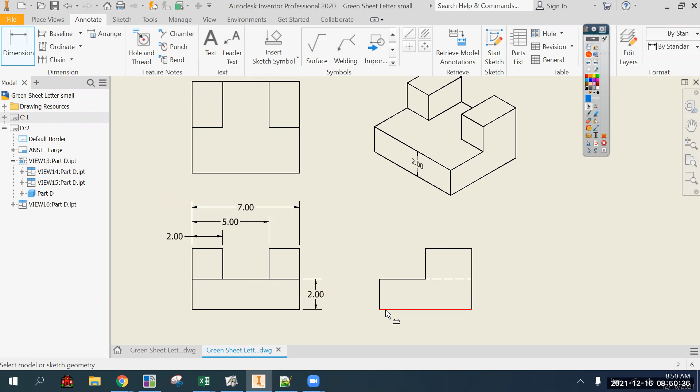First thing that happens is this edge right here, which is the height of this ledge like that. This is not ideal. It's not going to the edge of the shape. This is going to the edge of the shape. And so we're going to put it there. We aren't going to have it both places. And height-wise, the only other height dimension is total height.

There you go. It could go here or here, but planning ahead, I think some of my depth dimensions will be better off on this view because it shows the contour of the depth, and the top view doesn't show any of the contour of what is actually being dimensioned. So I don't want this height dimension on here, because then I might have some stuff crossing over, and that is to be avoided. So I'm going to just keep my total height there.

Beautiful. All right, and so that's height. Every time something happens, take a dimension. And the only other dimension is depth. And so we're going to do front to back. First thing that happens is the distance from the front edge to where this thing starts. But on the top view, it's not to a hidden line, but you can't really tell what's happening there the same way you can tell if you put this first depth dimension there. So we'll keep that one.

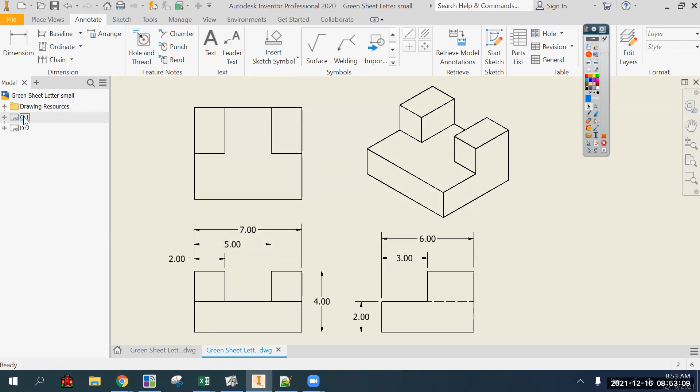Okay, then save your drawing. Yes to all, hit OK if you get that yes to all. And that's where we're going to stop it for today. I know that's a lot. But if you are at this point in first period, we only have these two drawings done. If you are watching this in sixth period, you will be A, B, C, and D. And again, I just realized that we can do these out of order in order of difficulty and then rearrange them as needed.

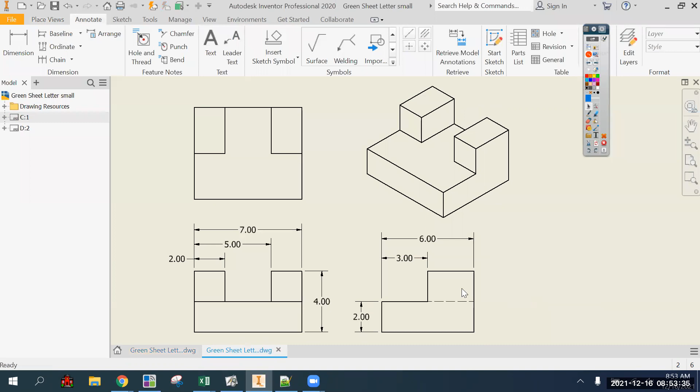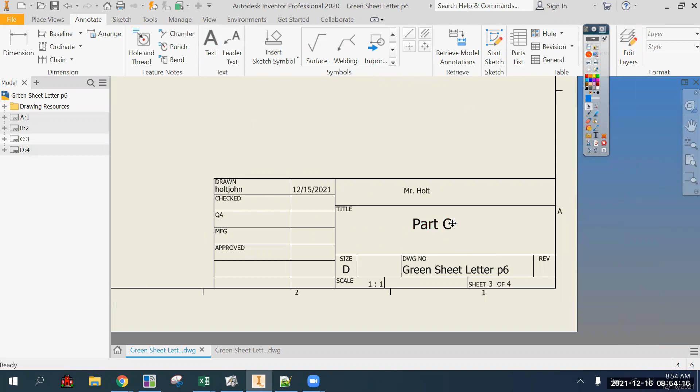Well, I'll keep this one as my formal one. Put your text information here. It's not critical that you make your text the same as mine, as in part C, as far as size goes, or have them left justified or something, but yours all need to be the same. Meaning, if my text area for part C has the file name here and it's this size and it's centered, it needs to be the same on all of them.

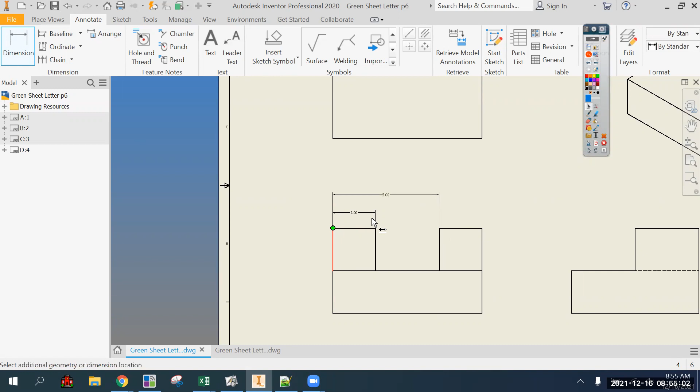Okay, centered in there, and your name in the same place. This is a good place for name. And using that font size. Okay, and then save it. I'll put some dimensions on here just so this is what yours will look like. I'll show you how fast it goes. There's the width, total height, and then some depth. And once you do a few of these, that's pretty much how fast you're going to do things.

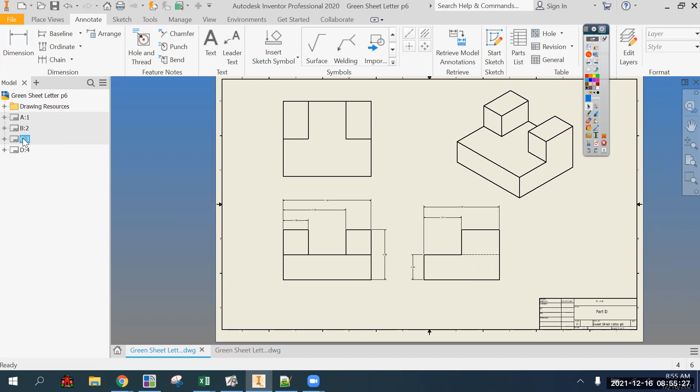So the dimension tool. This file is going to be my formal, fully completed one. So we'll go 1. This one is 5. And then total width. And we decided the height would be better over here. First click, second click, third click. And total height and depth goes here.

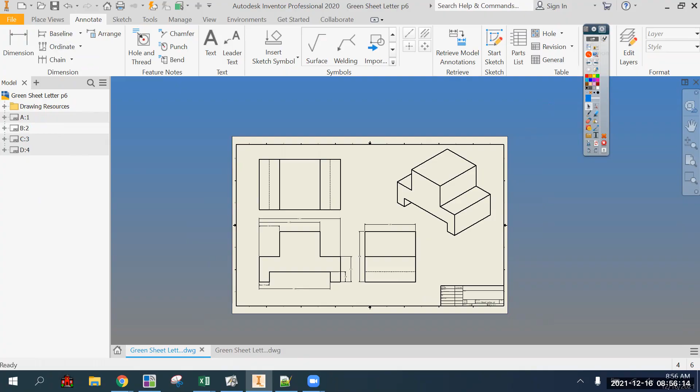And so part D, part A, part B, and save it. So you have all of your sheets on the same drawing file, at least for letters at this point. And we're going to go ahead and stop the video there so we can post it as soon as possible.